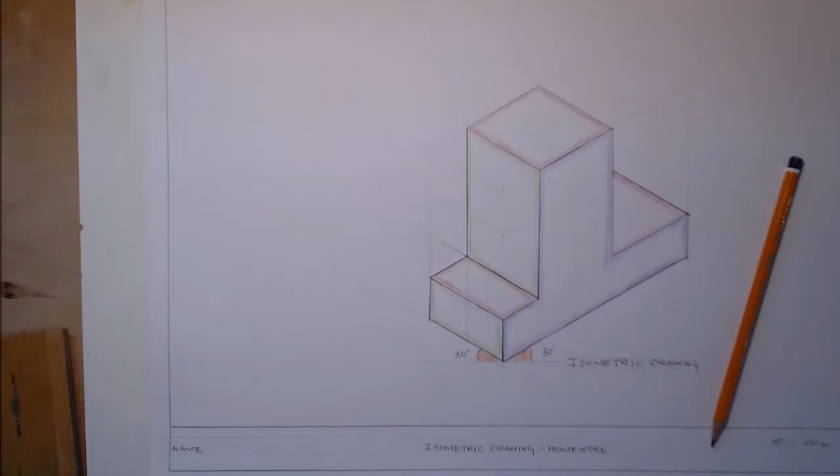Okay, we're going to draw the question that was for homework. It's this one here. Just a quick thing to note, if you read the question, it says it's made up of 25 mil blocks. That means that each of these squares is 25 by 25.

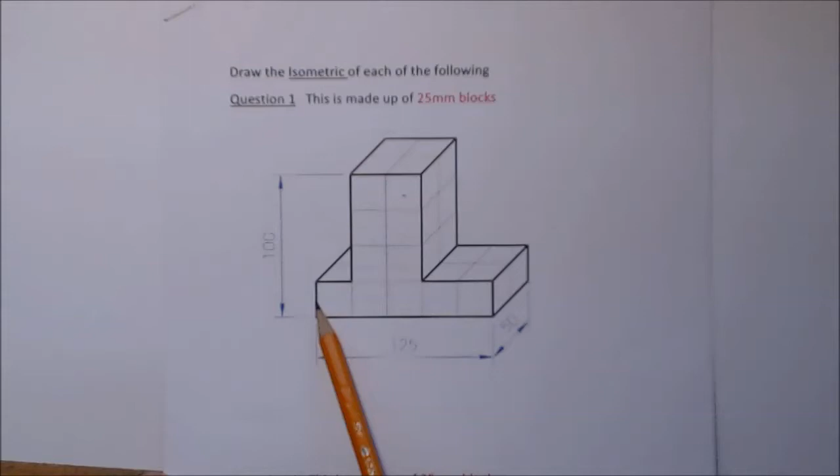So the length of this side here is 125, and if we count the blocks, there's 1, 2, 3, 4, 5. That's 5 25s, that's 125. If we look at the height of it, there's 1, 2, 3, 4 blocks. So with each of these being 25 high, that makes up the 100. Okay. So we're going to start off by drawing our isometric block or square that each side will fit into, our isometric block.

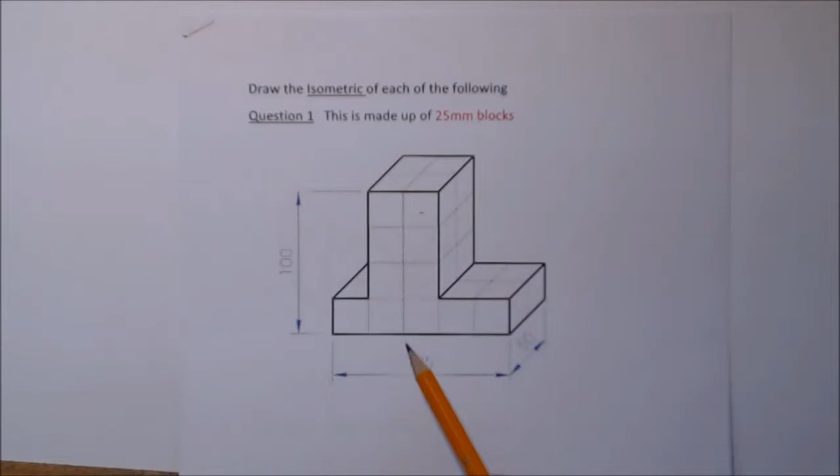Okay, so we start off and we come down. I'll just zoom back out there. We come down our sheet. All the time making sure our t-square is tight to the side of our board and our set square sits on top of it. Now we need to start off drawing this, we need to draw what we call our crow's foot, which is our 30-degree angle.

Now this is our 60 degree set square. It has got 90 degrees here at the top, it's got 60 degrees here, and it's got 30 degrees. This is the angle we want. So we start off and we draw our crow's foot, which is our 30-degree line going back like that and like that. And we'll draw our vertical line here. Now I'm drawing them a little bit heavier. You need to draw these lines lightly. I'm drawing them a little bit heavier just to make sure that you can see them on the screen.

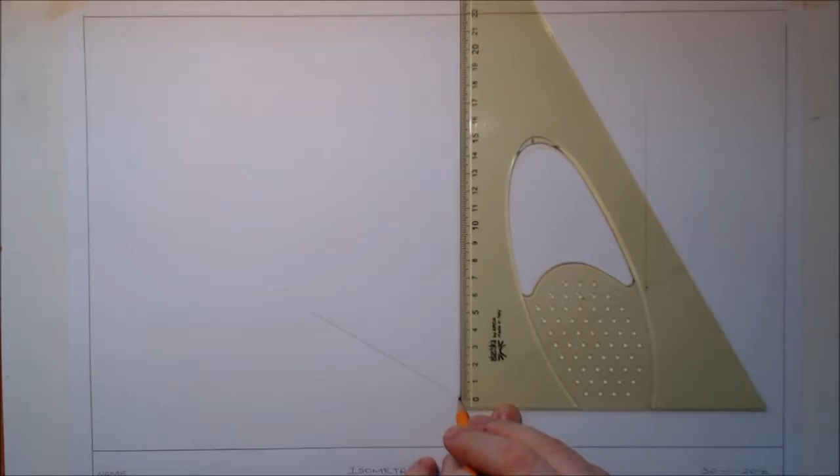Now I come back 125. All these lines you should be drawing lightly, by the way. And so 125 measured along there, and I draw my vertical line there. And then it's a 100 from the bottom, the point of my crow's foot there, up 100 there, and that's that side drawn.

Now, when I'm drawing all these lines, if they're not appearing parallel, that means something is wrong. Is it that my t-square is not sitting tight to the board? Or is it that my set square is not sitting tight on top of my t-square at all times? T-square tight to the board, set square sitting on top of it. All these lines that were drawn should be parallel.

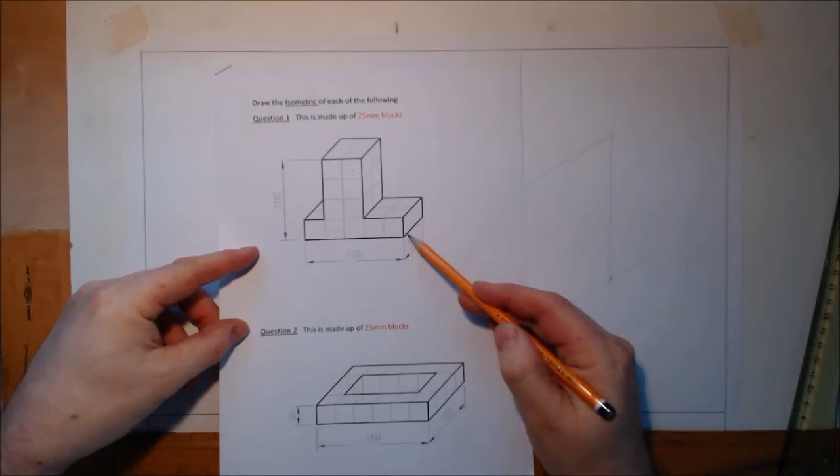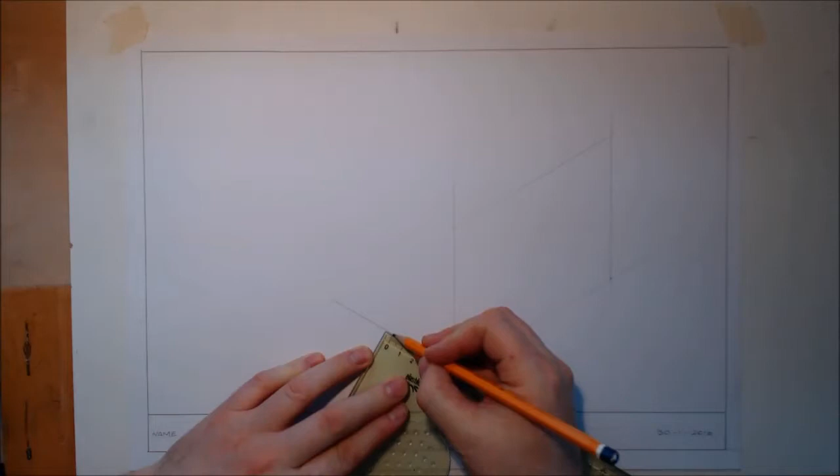So if I take a look at my drawing, it tells me that the width of my box, or the width of my object, it goes back 50 mil. That's 2 25 blocks. So I'm going to measure back 50. And draw my line vertically. And then from this point here, go back 30 degrees.

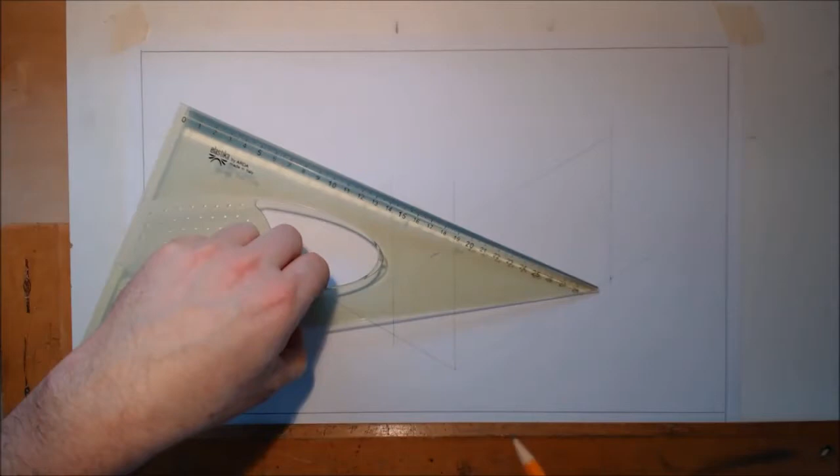Now, really important that you check and you're sure that you're drawing with your 30-degree angle all the time. Don't mix it up with the 60 degrees because that'll give us an odd kind of shape. So this angle here all the time. So you're all the time taking your set square and turning it one way to draw the 30-degree line there. And then turn it to draw the 30-degree line the other way. And the only other line that we're really drawing at the minute is a vertical line. So vertical line, 30 degrees,

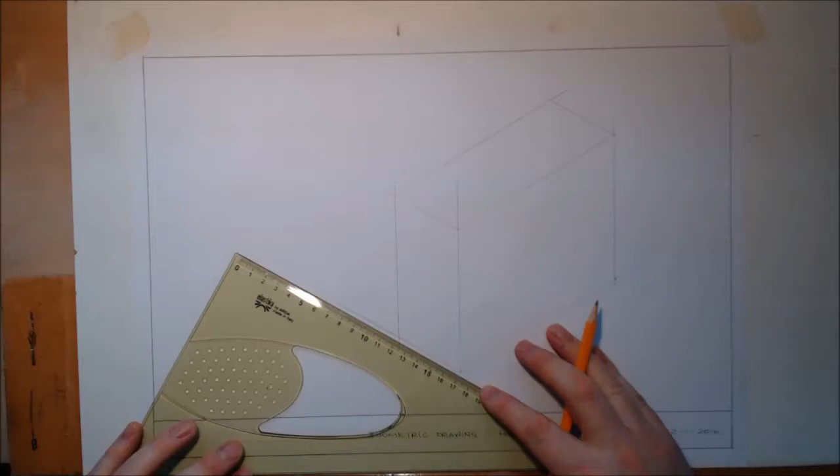30 degrees. Okay, I'm just going to put an extra bit of tape on my sheet because it's sliding up a little bit.

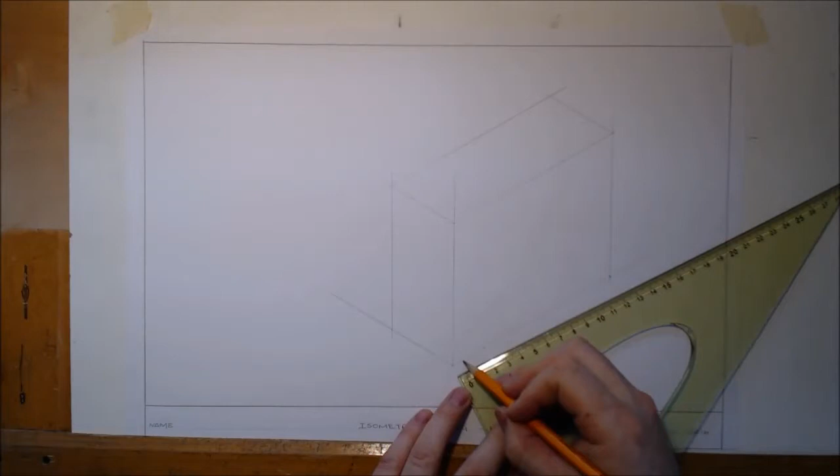Now, I need to divide up this side into my 25 mil blocks. So I set up my t-square there like that, and I measure 25, 50, 75, 100, and then 125. And all those marks are on the line. All those little marks I've just made. So now I'm just going to draw those lines vertically. Now these should be drawn lightly on your page. Like I say, I have to draw them heavier just to make sure that they come up clear on the screen. But you should be drawing all those lines nice and lightly.

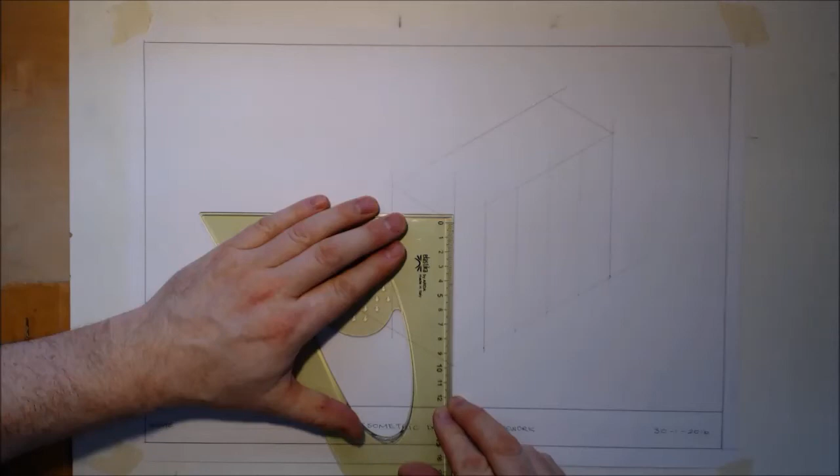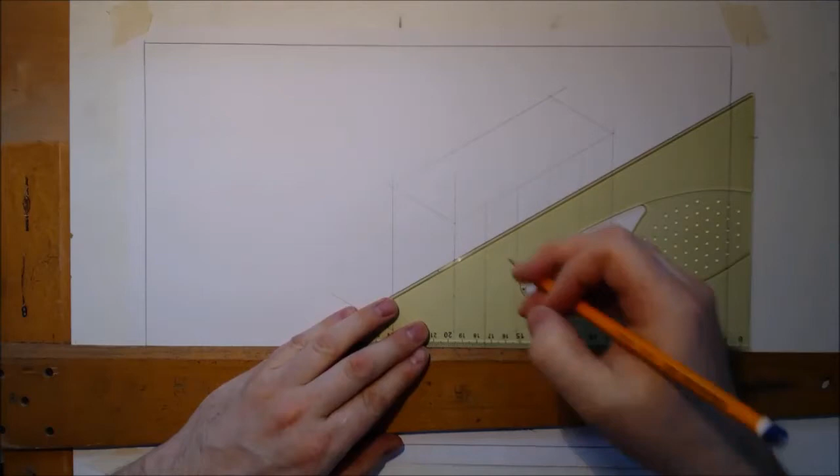Now on this side here, I'm going to divide up my 100 edge into 25s. So that's 25 there. And it's along the line. All the marks are on the line. Another 25 is 50. Another 25 is 75. And those lines all go back at 30 degrees. Now again, is my t-square tight to the board? Carry that line back. Is my set square sitting tight on top of my t-square?

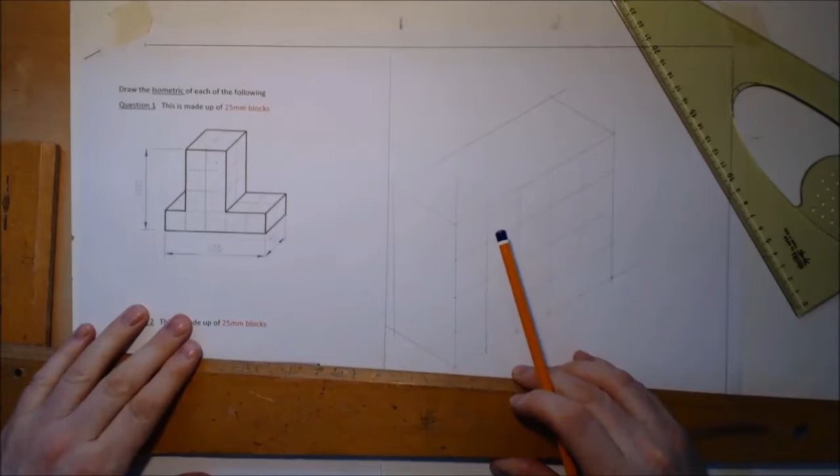Very, very important. Now, there's my grid. And onto my grid now, I can start drawing and finishing my shape. So what have I got here? I have, just on this front side, just to make things a little bit clearer for us, a vertical line here, which is from here, and I'm starting off drawing at this point here. Look, that's where I started off.

So I come up one block and I come over one block, and then that goes the whole way up to the top, and it comes across 2 blocks across the top here, and down 3 on this side,

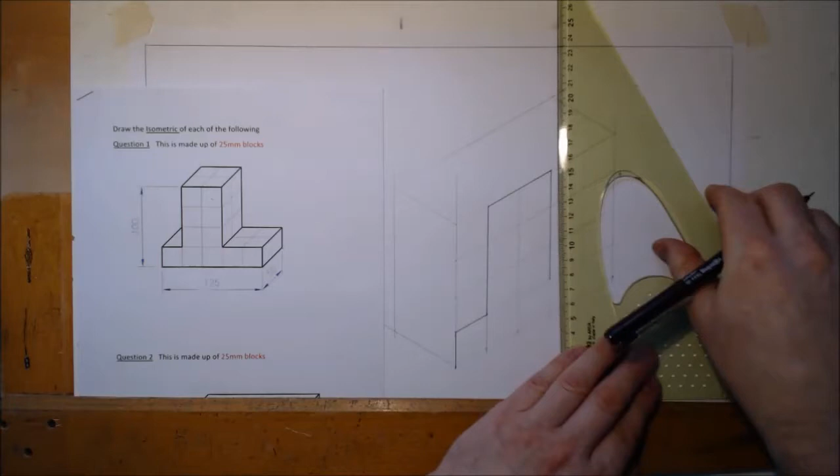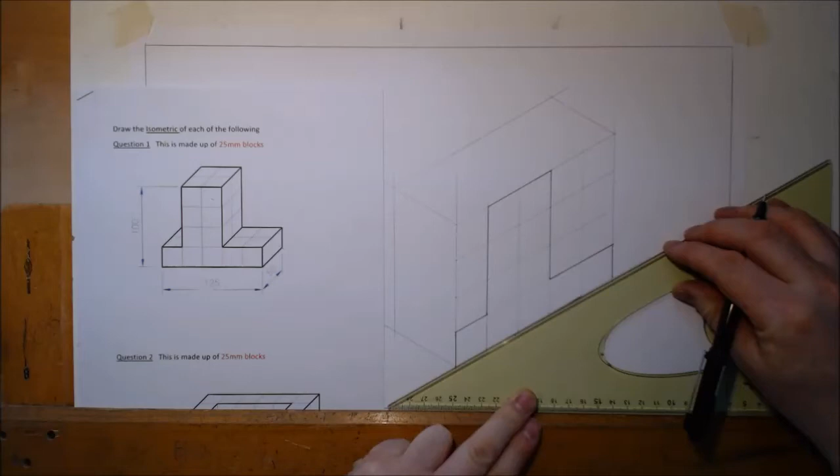and I'm just using the marker just to heavy it in. You shouldn't be using the marker, you should just heavy in with your pencil, lean a little bit more on your pencil. So on my grid line, I'm just following my grid now, and I'm drawing what I see on the front into my isometric square on the side. Just line it off a little bit there, just try and tidy it up a little bit. Okay, so there is what I see on that side.

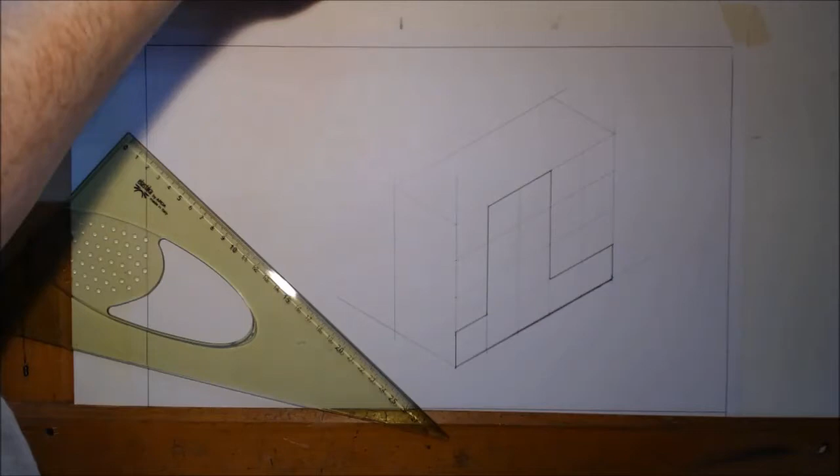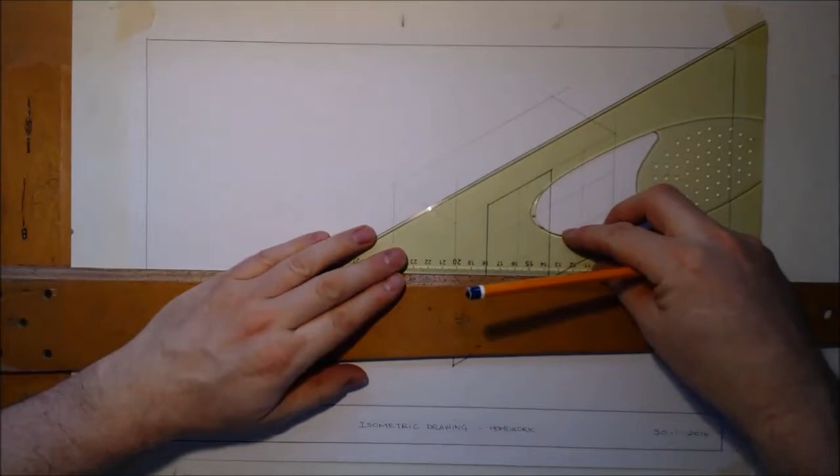Now, what we need to do next is we need to carry our lines across here and draw what we see on the side. Now on the side, actually what I'll do first, I'm going to divide this side up into my 25mm blocks as well. So there's my 25, that line comes up, and I'm going to carry that line over the top, and then all of this side can be divided up as well.

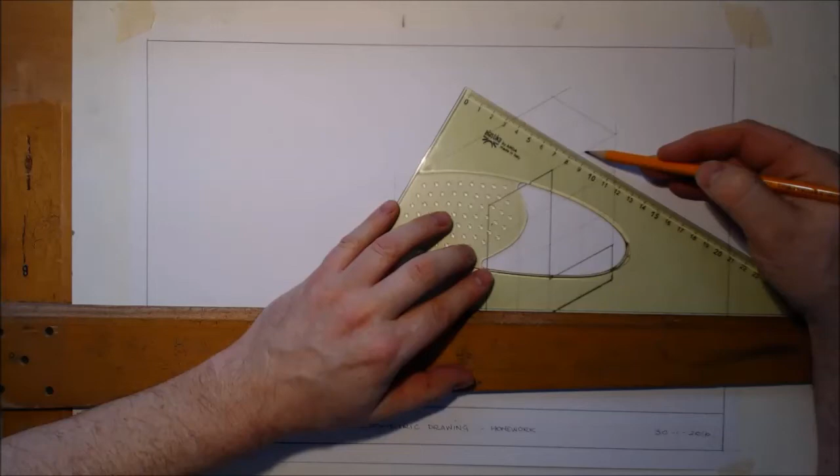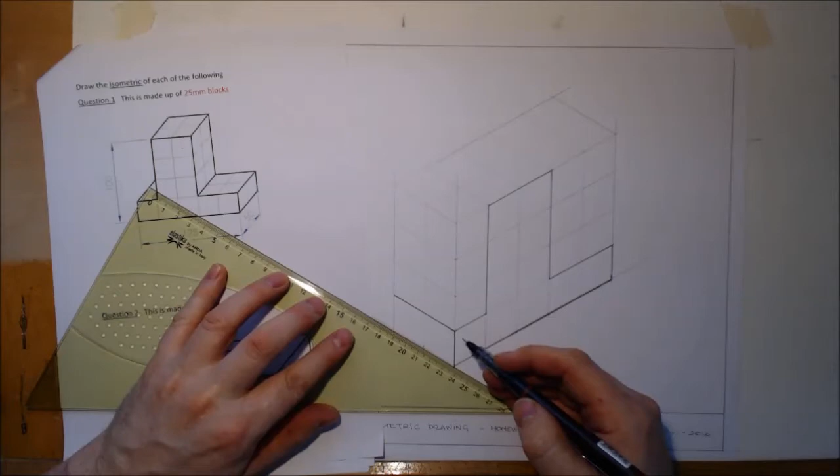And I don't need to measure them again because I have all these marks here already, and they all get carried back. And again, if these lines aren't looking parallel, something's wrong, something is off. So all my lines should be running back like that. Now, what do I see when I look at it on this side? Well, off my drawing, and I'm just going to heavy it in, I'm going to see that edge there, and it's 1 block high. So that edge there continues back like that. So I'm just heavying in those lines now.

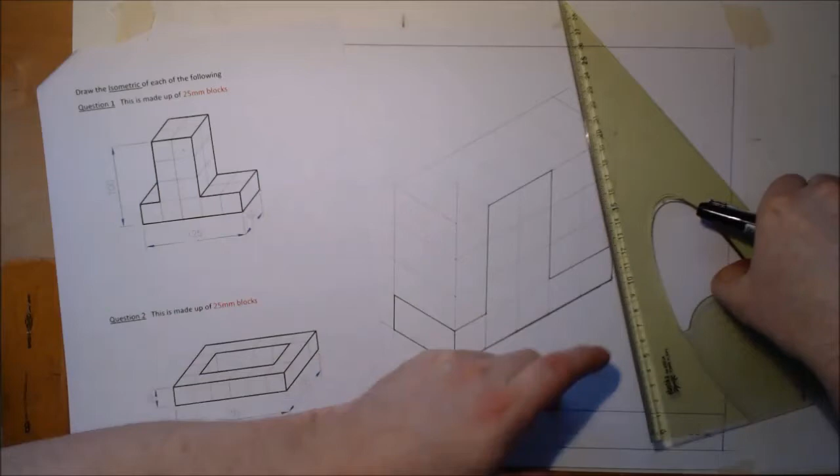What do I see on the top? I see that area there, that little flat part there on the top, and it's 2 blocks by 2 blocks back, so that's 2 by 2. So now I can heavy that in. And I have the grid lines drawn already, so I'm just heavying them in with my felt pen and across the back.

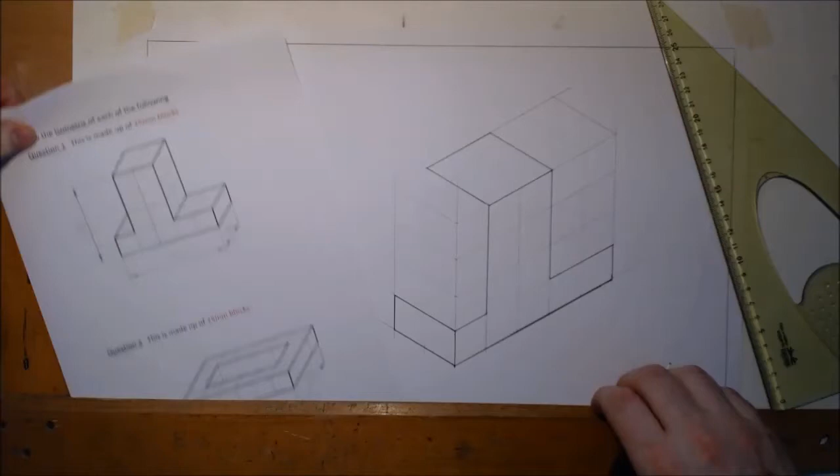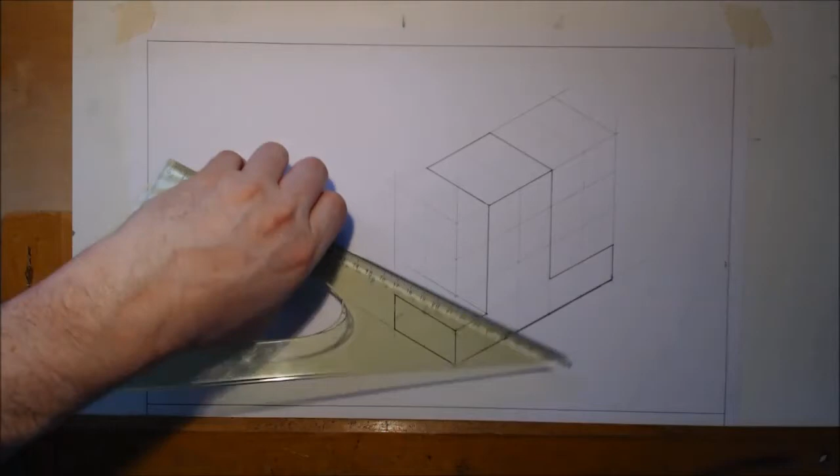Now, at this stage here, I have all my measurements in, what I see in each view is drawn in. Now there's a little bit of detail to be added in here. So that's the last thing to do. Let's have a look at this point here. Let's take that and go back at 30 degrees. And let's turn our 60 degree set square along and return it back on that side. Now that's going to give us, if I can just heavy that in now, this little flat portion here.

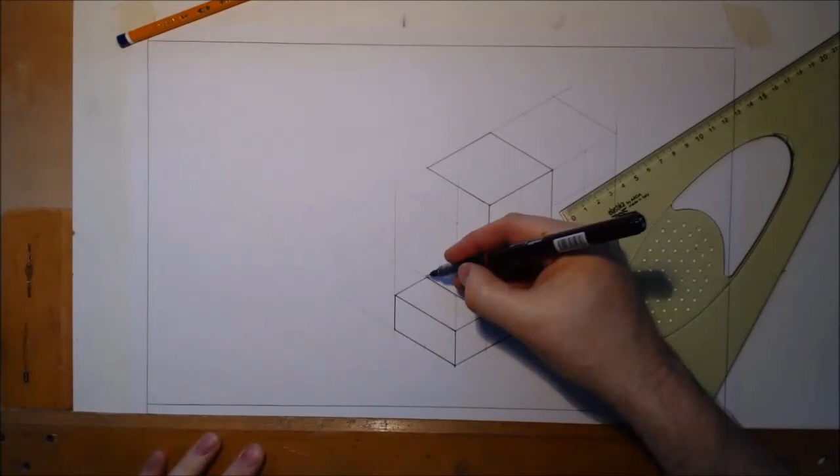Okay, and where does that go? That little flat part there, it runs the whole way up to here. So I turn my set square around, T-square tight, set square on the T-square, and I draw a vertical line right up to that corner there. And that completes that side of it for me.

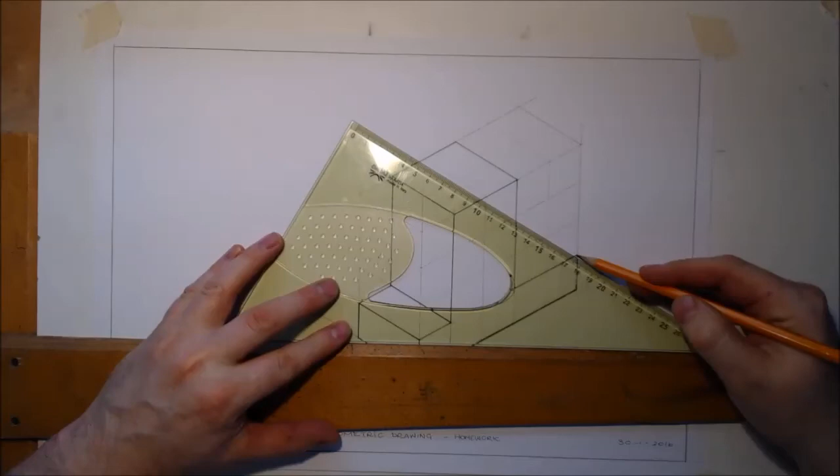Now, something's happening on the back corner there. So if I bring that line back at 30 degrees, now really that line at the back runs at that level the whole way through, and we just see where it meets on the corner there. So we can heavy that line in, that runs back, and there's my view complete.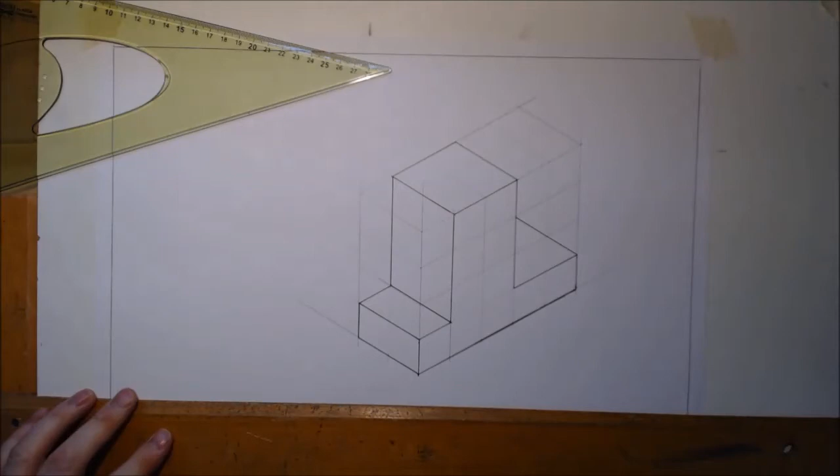Line your page, put your name on the sheet, isometric drawing homework, put the date on it. There's our drawing complete. Couple of things you can do if you just want to finish it off. You can actually draw the squares onto each side.

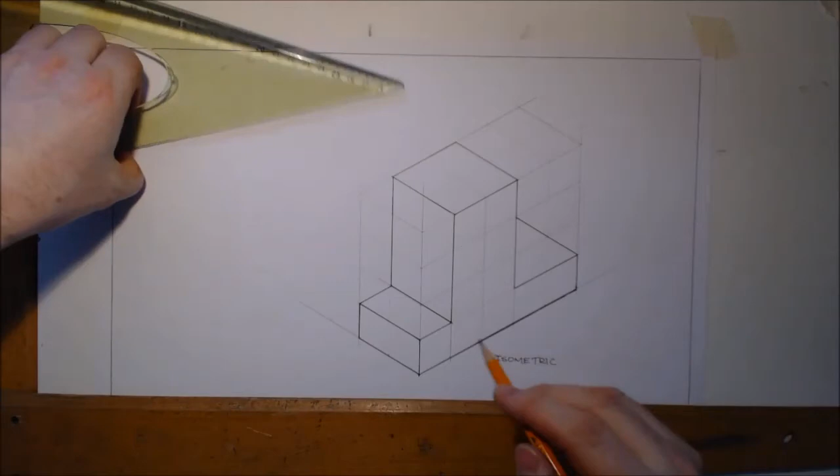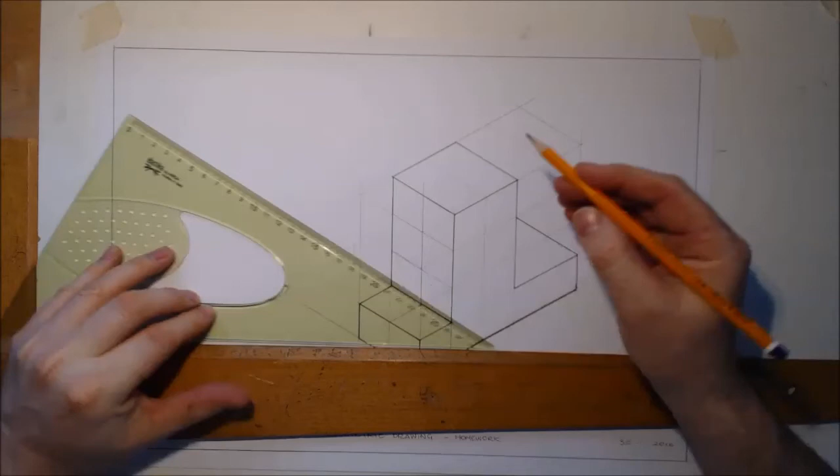So that line there comes up there, and it actually carries across there, and that will give you the squares on the surface of each side. And then that line is up there, which we have. But the squares on the surface here return there and there, and that's it. A little bit more here actually. That line just goes back there like that. So that's actually just drawn on our blocks, which is not necessary, but you can do that if you like. A little bit of light shading, and there's our drawing complete.